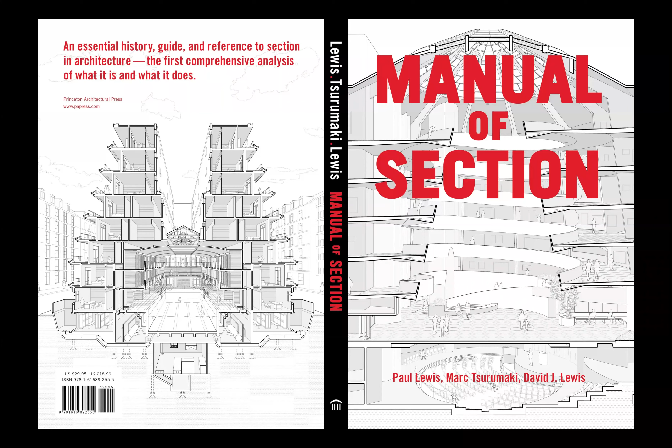So what I want to do with this talk, and it's a talk that we've been revising and working with for a while since the book came out, is actually talk about the Manual of Section and use it as a way to frame the work of our office. And just as an introduction to the Manual of Section, what we find very compelling about section is something that we've used instrumentally in the design of our work to begin with, which is that section is this fantastic, in our mind, purely architectural approach to design that is simultaneously incredibly abstract and also hyper-specific.

It allows you to look at things in terms of the way in which they're organized, but not necessarily the way in which they're perceived. In other words, it gets at issues that are more abstract, whether it's structural forces or interior-exterior envelope or circulation systems or relationships between social hierarchies, but to do it in a way that doesn't always privilege image. In fact, section is almost antithetical to image in the sense of facade and object, at least exterior presence of the object.

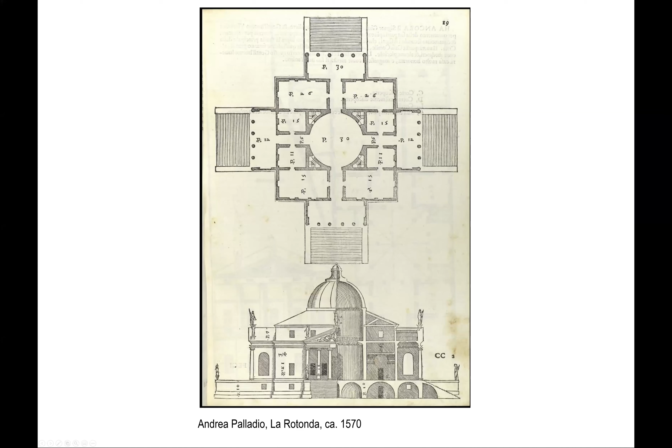And certainly you all know section as being one of the three canonical representations. It's often the support system for the facade, and everything's driven by plan. And from the standpoint of architectural teaching, we had been frustrated about the limits on ways to think about section. Again, it's instrumental in how we think. It's exactly where the tectonic specificity of architecture hits into spatial questions and organization. And it's also something that from a representational standpoint has a fascinating history, which I think is also why it has been somewhat less dominant within the last two centuries of discourse on architecture.

Section came in after, as an analytical tool after bodies existed, whether it's human skulls or monuments of antiquity. So section's history is actually a tool to understand that which already existed. And frequently section is used that way in architectural design. It's a way to section through your Rhino model. It's a way to understand the design, to allow technical expertise and consultants to weigh in. And this we find both a historic precedent and also a contemporary model, but it's ultimately a frustration. So we're much more interested in the ways in which a section could be generative for design.

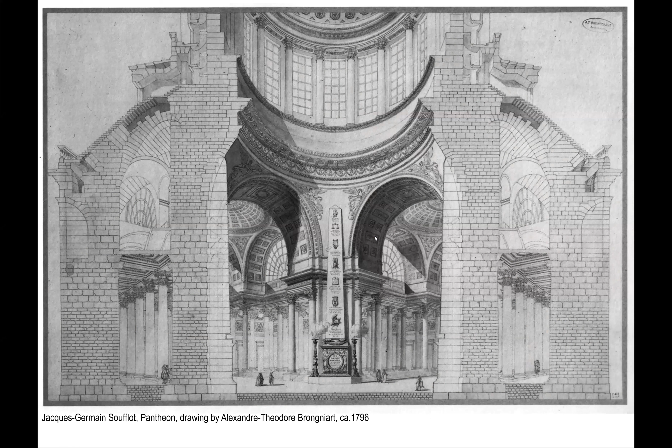We've also been super interested in section combined with perspective. You get this collapse between the abstract and the invisible with the highly optical and the experiential. So the section perspective is this paradoxical representational technique that we found super interesting. We've used it in our design approach, and it was the basis of the book. So what we did with the book was to try to say, are there ways to distinguish types of section? In other words, are there clearly different ways in which architects produce effects that could be played out through section and means of section?

So there are seven models we put forward, or typologies, if you will, which we felt to be distinctly different means, although of course most architects hybridize these in interesting ways, and we would never argue that any of these section types have value in and of themselves. It's simply a heuristic model to get at a logic of understanding section.

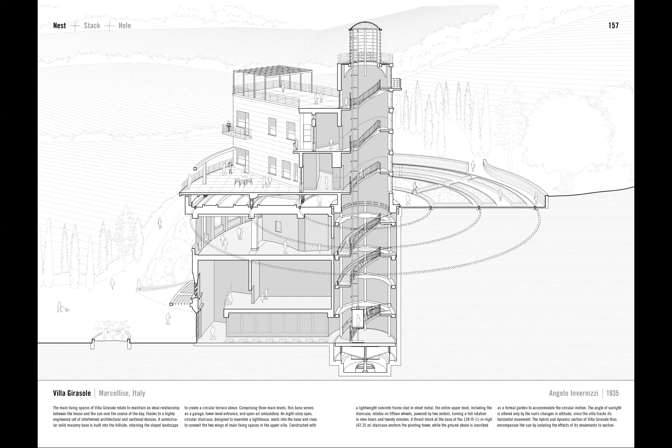We developed the book around 63 buildings of a range of scales, from small scale houses to very large scale buildings. And the key in each of them was to develop them as a single cross-sectional perspective that would allow us to look at the simultaneity of all the things that make architecture pleasurable. So whether it's details or space or organization, program, even, as much as we could, questions of context and position. But to do each page as a single drawing, an analytical proposition done not through hundreds of little diagrams, but through one drawing that would get at that complexity. So let me use the different types as a way to introduce our work, if you will.

So extrusion is the dumbest section type. If you get a bad review, it's probably because you basically extruded your plan up the height necessary to make the project have a viable space, and you're done. You basically haven't developed the vertical dimension very much. But there are ways that that can be done in an interesting way.

So for example, Philip Johnson's Glass House is basically pure extrusion, but it does so by intensifying the role of the glass. So the reflection, the elevations, because of the precision of that extrusion, now allow for this more complex exchange between interior and exterior, between reflection, between privacy, display, etc.

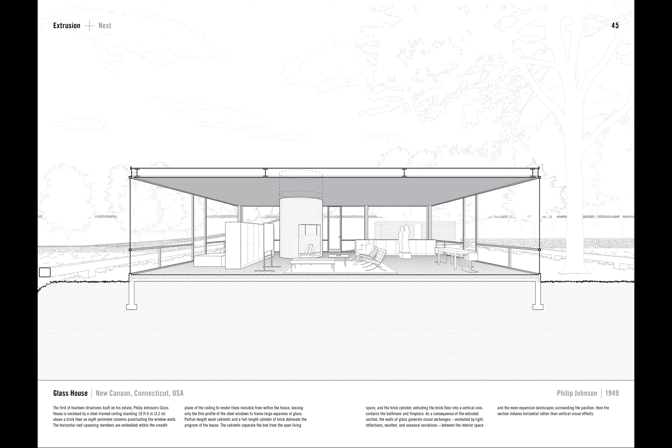So another example of extrusion that gets quite interesting is when you do it beyond conventional heights. So Nervi's amazing palace in Turin, where these things are 82 feet high and they become a kind of spectacle space. So it goes beyond normal conventions. So those would be two examples where extrusion started to push into more interesting realms.

So the first project I'll present, that Stephen mentioned in his introduction, we just completed last year, and it's essentially all an extruded project. It's purely plan-based. So in a lecture on section, I'm going to start off with a project that's basically plan-based. This is an early childhood education center, basically a preschool for very young ages, from 6 weeks to about 5 years, about 200 plus students, 20 classrooms.

And it was also a model school for teaching how to teach young children throughout the state of Arkansas. The site is flat. The program with young children didn't allow for any variations in section, not even a ramp or steps. Everything had to be flat.

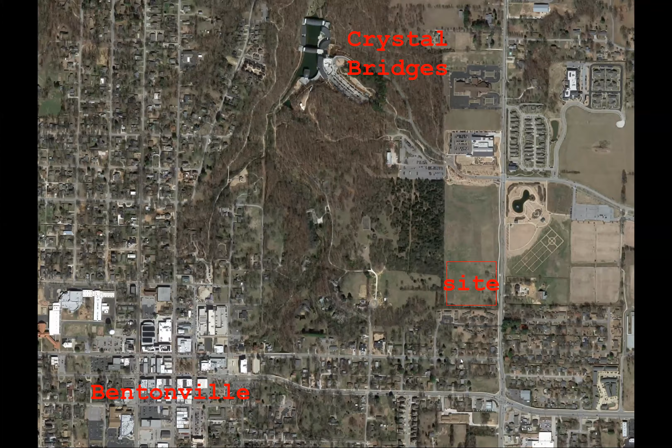And the budget was very tight, so we knew we were dealing with a very simple construction type, and that most of the exchange would be taking place in plan between the classrooms, between interstitial porches, and then the playgrounds located in coincidence with the different classroom types. So the younger kids would be here, gathered around the outside.

Are you seeing my cursor, by the way? So I can annotate, but then you have to toggle between annotation and the PowerPoint, so that's a pain.

But so this is slightly older groups, a larger scale playground out here, and then the 4 and 5 year olds would be gathered around the larger outdoor play area. So the project is in effect about relating interiors and exteriors, playgrounds and classrooms, as well as an entry court for bringing people into the project.

The diagram is based on extruding those double-loaded corridors, and then internal to each of those classrooms, developing a room within a room, so that one would effectively have a quieter gathering point within a relatively straightforward construction, bar joists and metal deck. But you would get this exchange between the houses visible in the hallways, moving to the inside, and even playing out in the cedar fence that runs around the building.

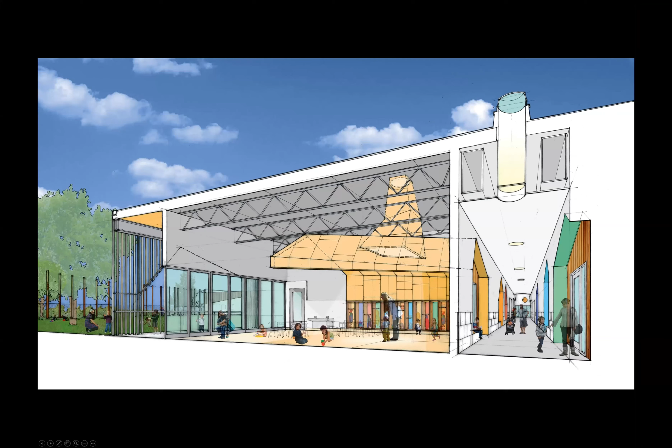So each room is identified by the image of the domestic house, coded by a particular wood material. That then extends out into a felt-covered, more private or acoustically slightly separated area that connects to this very large 8-foot wide outdoor screened-in porch. So even in bad weather, they can go outside, and then extend out into the play areas.

And here you see the traces of those projected volumes on the inside now being manifested on the outside on the cedar trellis that runs around the building. The other thing that was interesting was to find a way that that extruded height would start to be mapped out around the landscape.

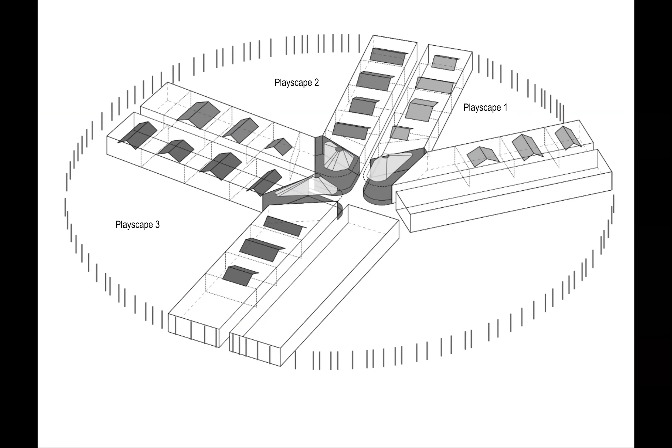We obviously had to have a fence relative to code around the playground, but we marched a series of 20-foot high posts around at the height of the extrusion of the building, so that it would turn the entire exterior and interior into an articulated space. And more importantly, at the front entry, they would be marked as battens on the facade of the HardiePlank, inexpensive construction.

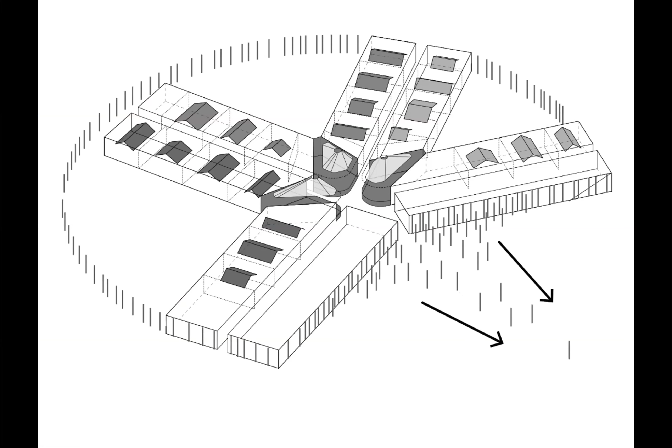But those would then filter out into the front of the building to animate or inhabit that entry cadence. So it was more porous at the entry and then became more protected around the play areas. And then inside, we were interested in ways that you could use the collective gathering point.

And this, we kind of referred to this as a centralized plan that has no center. In fact, every single one of these corridors misses each other. There's a much more complex geometry. It's not a circle, it's a series of arcs, and each of those has a different centroid. So we like the idea we'd have the efficiency and the clarity of a center, but without the kind of power control of a panopticon.

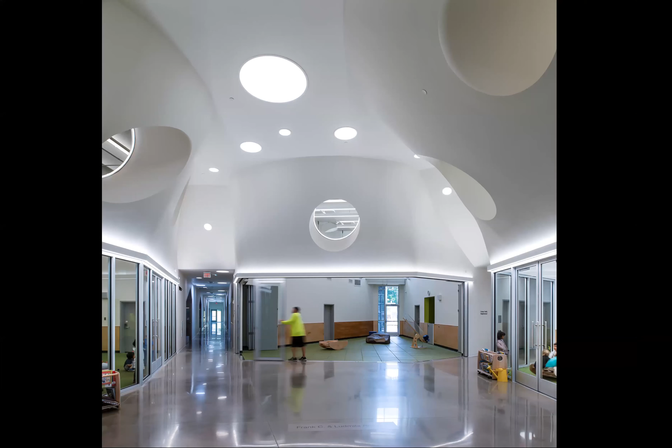And then internal to that center, we would take the hallways and, in a sense, bring that drywall into the space and billow it out to acquire these much more thick, almost kind of playful, cloud-like, Stay Puft Marshmallow-like qualities to this interior area, and then look at ways that we could use sliding doors to allow that central meeting area to also be a gathering room for the larger community. And here, an image looking up at the various oculi that define what we think is a more interesting heart of the project.

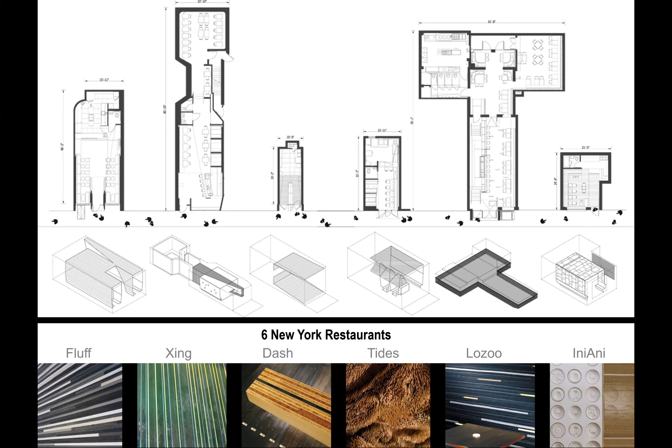So we've done a number of projects over the years that are limited to extruded spaces, and we often play up the intensity of the materials, and there's usually a shift between efficient plans and seductive surfaces, looking at ways that we can invent surfaces within that limited height. So again, if you can't do much in section, can we play it out through an aggregation of materials that produces variations in elevations as you go up?

So here you have the darker felt at the base where it gets hit by people, and then lighter as it goes up to the ceiling. So we would get some vertical dimension, even though we couldn't articulate that very well through any kind of a more complex spatial assembly. And here a view where that surface becomes a kind of signage, drawing you into this bakery.

Okay, so stack is also not terribly complicated. In fact, none of these section types are terribly complicated. They're pretty straightforward. But section is basically stacking extruded spaces on top of each other. Now, that's pretty banal. It doesn't tend to produce projects that one thinks of as having interesting sections, but there are ways to do it where it actually is much more interesting. So one is to start to look at difference. So you can have a kind of an A-B relationship, served and servant.

So the Kahnian model being played out through Mies van der Rohe in Crown Hall, where the lower floor, lower ceiling height actually makes possible the grand space of the studio above it, and again, two different extruded ceiling heights being fitted together, stacked together to produce beneficial qualities for both.

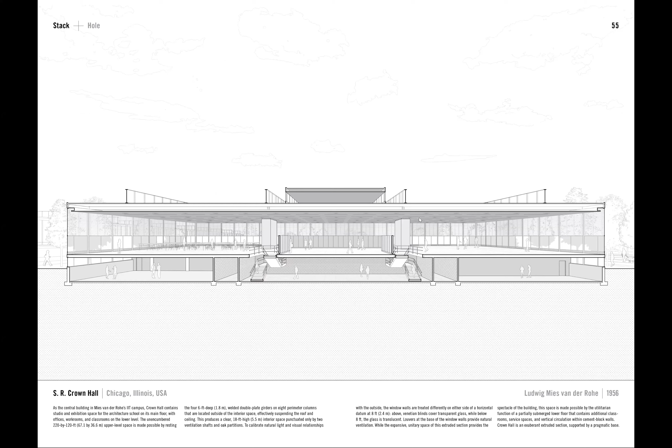And then this idea of difference in section played out through stacking was moved to a more extreme version, or a more explicit version, I suppose, in MVRDV's Hanover Pavilion. Each floor a unique section height, new material, new kind of environment, in a sense encapsulating the range of Dutch landscapes placed on top of each other to express their difference through their proximity in the stacked section.

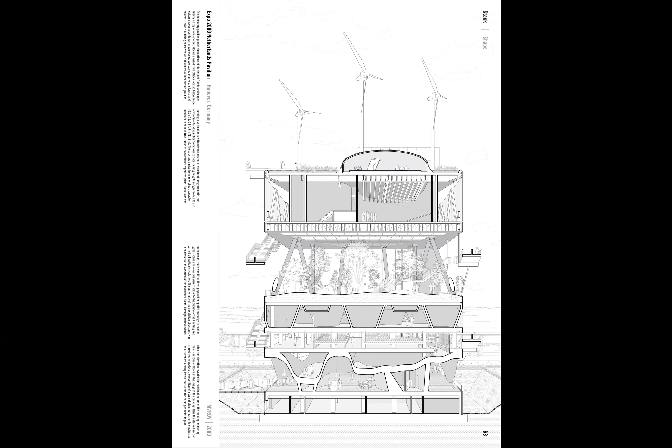So we've looked at using the difference in a stacked section to advance an architectural argument in a project called New Suburbanism, where we looked at how the horizontal real estate of a big box store could be used as a territory upon which one could then place the mini mansions. So continue the American dream that manifests itself in sprawl, but do it through section. So enable the continuation, but also the mitigation of the American dream through the role of section. So here you have the big box store below.

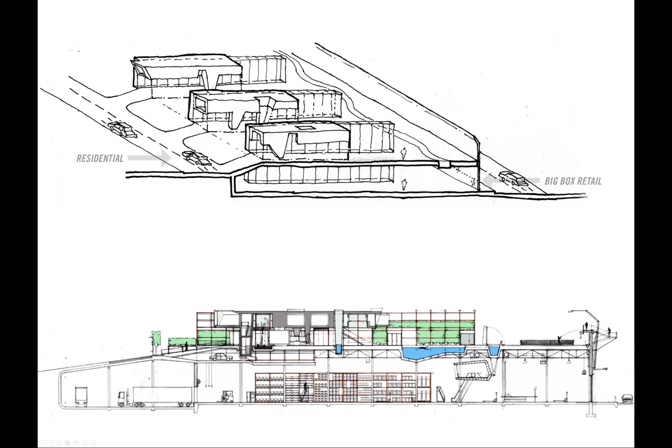but that they would be separated out relative to visual experience, meaning you would not necessarily see that you're above the big box store. You would have to actually commute around the block. And in the act of doing that, you could open up the parking garage to other community facilities, playing fields, and so forth.

All right, so the third model of section that we put forward was shape, and this makes the argument that architects have produced effects in section by not simply working with flat floor plates, but actually contouring them by starting to shape or modulate the ceiling, the floor, or both. That architects have been able to produce effects.

Often these are effects associated with structural efficiency or structural alignment in the roof, or they're used to puddle program, gather social groups because of the nature of the shape, being able to facilitate exchanges that now have certain hierarchies and certain levels of intensity within that geometry.

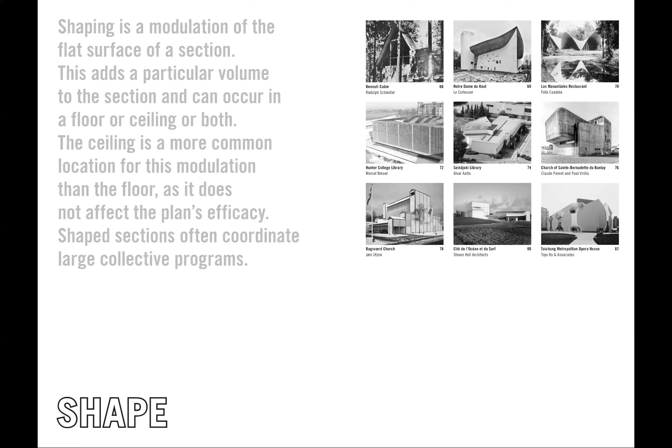So a couple of examples, certainly the structural one is most explicit in Felix Candela's thin concrete shells, amazing buildings. But what's interesting to note here is not only does this follow a kind of form finding strategy, but in so doing, the shape starts to take the scale of this restaurant and break it into smaller scale areas to eat that are then connected to windows to the park beyond. So there's an effect not just about structure, but also about program.

Similarly, Utzon's church outside of Copenhagen uses the geometry of the ceiling to, in a sense, choreograph the relationship between the preacher and the congregation, and to do it in a way that evokes the heaven, bring light in, etc. But that also plays itself out in this kind of amazing structural inversion, where in this case, the suspended ceiling is actually external to what appears to be the ceiling on the inside.

In other words, where typically in the United States, we suspend drywall ceilings from structural slabs, here this is reversed, where the structural slab is actually the ceiling, and then the cladding, the roof, the more rectilinear roof, is placed on the outside with a cavity space in between. So kind of interesting things that get revealed through section.

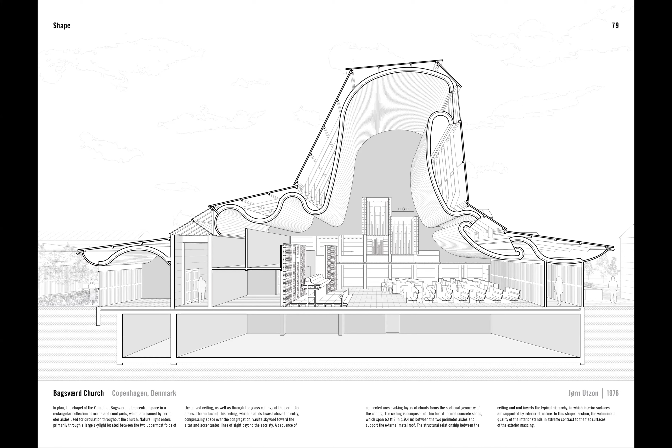Nowhere is that probably more legible than in Ronchamp. When you start taking a section, you start to realize the incredible peculiarity of this building, that what appears to be the thickest wall is actually made with some of the thinnest veneers of concrete, whereas the thinnest wall is actually the most substantive.

You have this incredible space in the kind of billowing underbelly of the ceiling, and how that has its consequence on program, where it's both a kind of cave-like space, but it's a cave-like space that's pushing, in a sense, out to the exterior, the pilgrimage church, and the hilltop location.

I like using this slide to talk a little bit about the difference between the continuous structural shape ambitions of a project and where it starts to hit its limits. So Toyo Ito's incredible opera house, which was a kind of repurposing of a previous diagram, now played out in this particular project. But you start to see that the shape section is actually not terribly conducive to larger scale buildings, precisely because there's not that much surface on which you can occupy.

And when it gets played out as a three-dimensional game, it really often becomes just enclosure. And then you have to insert a series of sections to enable it to actually work. So a kind of difference between a spatial ambition and the pragmatic realities of the limits of the shape section pushed to an extreme degree in the way in which Ito had done it in this opera house.

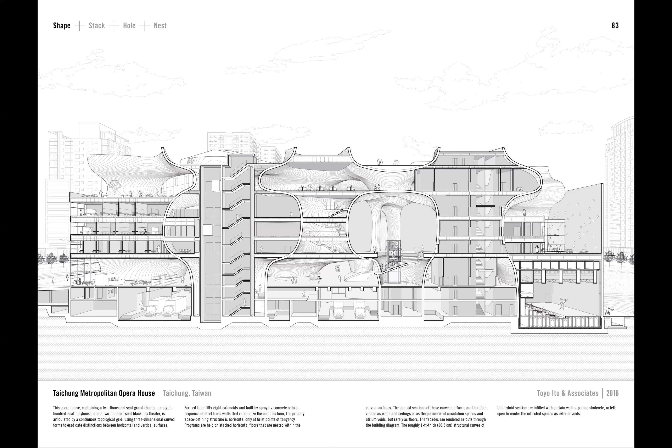So we had looked at how one could design an entire museum just by adjusting the floor and just by adjusting the ceiling. And this was a strategy largely for trying to win a competition where we knew there'd be 1,500, 2,000 entries. So we had to have a project come down to a super simple diagram, but be able to be expanded to encompass the very large square footage of the program.

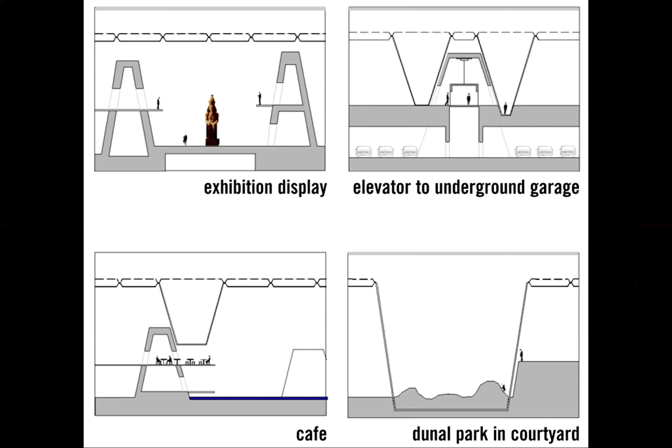So the museum is really just about the articulation of a ground and the articulation of a ceiling. And the strategy was to move beyond the conventional gallery to start to induce greater possibilities. So to, in a sense, get a multiplicity of spatial relationships that would be played out through a really simple diagram.

And that we would then also be able to visualize this through the kind of cross-section perspective to be able to show continuity between the ceiling and display cases, ways in which we could look at the exchange between interior and exterior within the project, while making sure that the entire project is constantly focusing as a series of parallel strands back to the Great Pyramids beyond.

We thought this was a great project. We were convinced we had a shot at this one. We did not win. I don't even think we placed.

But as Stephen knows, I like to make a joke about this, which is we then recycled this idea for an all-you-can-eat buffet in Las Vegas, which was the challenge of, again, a large program, and how did you break it into smaller scale units so it feels like a series of rooms within a larger pancake building. So 600-person buffet, all you can eat, big food service display around the periphery. How do you make this all possible?

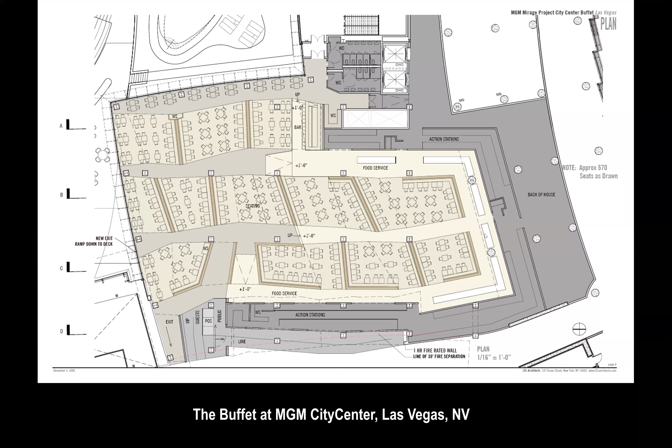So the strategy was to contour the ceiling, contour the ground, but to do them in alignment with each other. So you would get these different rooms in which you could gather, but when you stood up, you could actually get views to the food. So you both could nest into the space, but also have the visual continuity that you would want, looking both to the outside as well as to the food area.

And just to give you a sense of how that works, we become obsessed with reflected ceiling plans. We probably spend more time designing the reflected ceiling plan than we do the plan itself. You can do so much more in the ceiling than you can the floor, because nobody's walking on it. So designing the ceiling is essential.

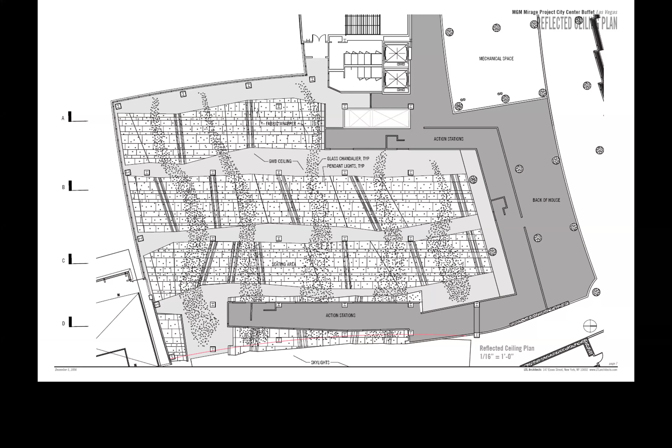It's not just a kind of technical result. Don't let Armstrong and other ceiling companies dominate how you design. Take it on as a key component of the project. And some senses of how those fields of lights would manifest themselves in different dimmable backlit surfaces, pendants, fields of pendants, etc.

So, a different project where we were working with the logic of a volume and how we would contour it was a renovation out in Claremont, the Claremont University Consortium Administrative Building, which used to be a maintenance building, and we were asked to convert it into an open office for about 100 employees. And the brief said no one should have a private office, it should all be open.

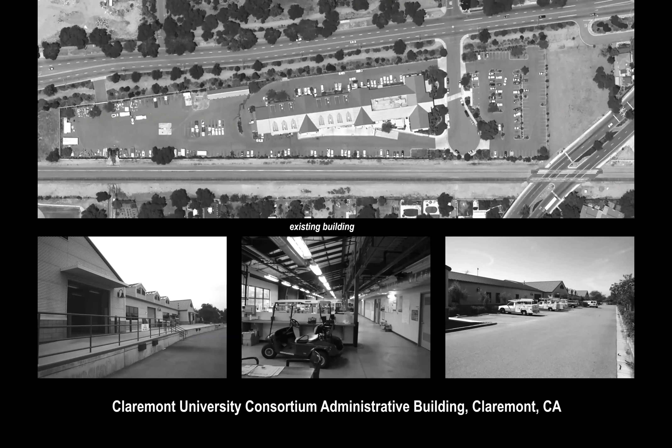How do you convert a maintenance building into an open office that takes advantage of some of the peculiarities that come with a maintenance building, namely these relatively column-free, large-scale trusses, 30-foot, 40-foot high ceilings? Could we use this to our advantage in making a much more unusual kind of open office space?

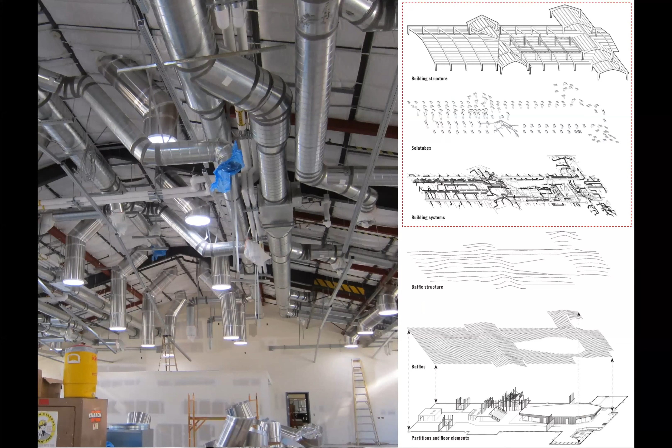A lot of our work, as I mentioned before, took place in the ceiling. So not only would all the ductwork and the Solatubes and all of the infrastructure have to be placed in the ceiling because the slab had already been poured, but how would we turn that into an advantage by suspending a series of custom baffles that would form a kind of sculptural territory or cloud that would gather people at the ubiquitous bleacher seat.

But in this case, we liked it because it didn't actually go anywhere. It just went over top of an electrical room that we had to keep in the plan. So it was an effective gathering point. But more importantly, we were able to use the ceiling and the Solatubes and the natural light and artificial light to allow the space to really animate during the course of the day into the night. So it really became part of the life of the project, as well as the gathering point and a sense of organizing the relationships internal to the program.

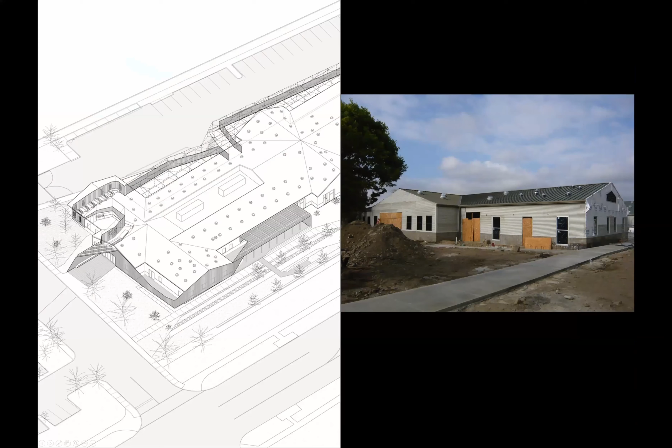On the outside of the building, we did a similar approach to take the fairly conventional building and use its geometries to do more. So extending those pitched roofs to gather outside areas, torquing the cedar screen up to produce a canopy for shade on the outside, basically making the building thicker at its skin to make the exchange between interior and exterior more inhabitable. And then even at the entry, that would be the defining characteristic, to turn that screen into an entryway that would bring you into the project itself.

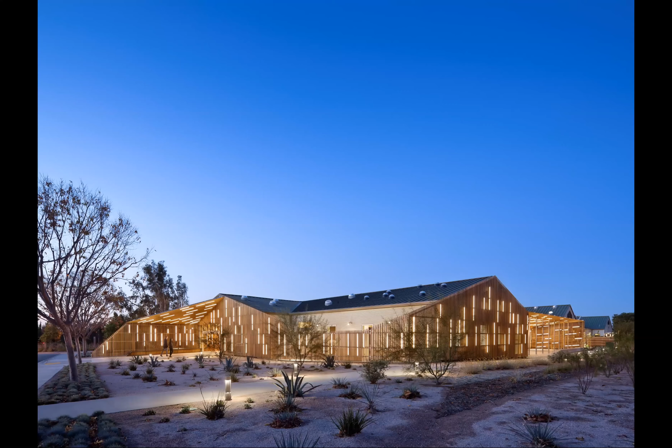And finally, a shaped ceiling that many of you are inhabiting, I appreciate the backgrounds, is a lecture hall at Columbia University in a McKim, Mead and White building.

We knew we couldn't alter any of the mechanical ducts in terms of their location because it would trigger a kind of grandfather clause and a reevaluation of some of the aspects of the building that we couldn't get into. So we had to try to embrace really the 20th century technology that had been added to basically a 19th century building, and do it in a way that both could benefit.

So the strategy was to work through a kind of coffer system that would be programmatically rich or functionally rich. It could be diffusers, downlighting, projectors, stage lighting, etc. And to do it in a way that it does taper up or is contoured to allow the windows to be visible, while also accommodating all of the stuff that's necessary for comfort and the use of the space as an auditorium.

Okay, so the next section type is really pretty specific to housing and to certain building types that need to maintain efficient uses of their FAR, of their floor, but they want to introduce greater capacities for inhabiting the section. And it plays itself out in two different ways, either vertically or horizontally. And what shear does is basically, it's where architects in the act of stacking their sections have started to look at incremental differences that could produce beneficial qualities in the vertical dimension.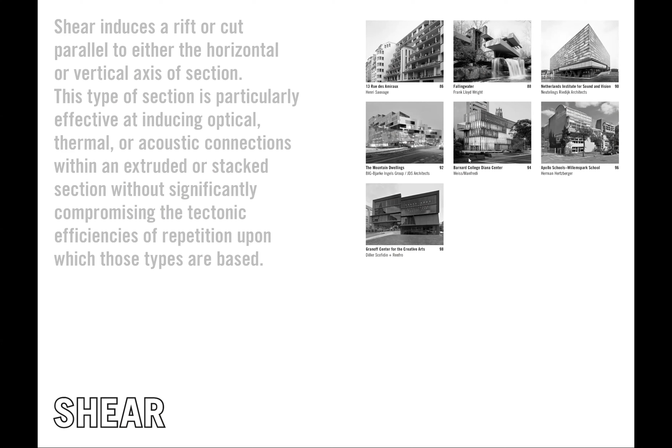So in the horizontal shear, where each floor is just slid back slightly from the next, it opens up one side of the building to light and air. And so Henri Sauvage used that to good effect in his project in Paris. And he was smart enough to realize that the downside to the horizontal shear is that the underbelly gets quite dark. And so by placing these two against each other, he was able to then fill that underbelly with a program that didn't need a huge amount of light, namely an indoor swimming pool. And so the project embraces both the beneficial side relative to light, as well as the darker underbelly relative to this particular program.

Now, one could look at the mountain housing and realize that in effect it was a parking garage first that was then clad in the housing. And as a result, it could achieve a much greater rake, that it could have actually a bigger underbelly. And then as a result, the terraces, the garden areas, the outside spaces for each of these dwelling units are actually quite expansive, quite open to the air. But it's because the ratio of parking to the interior was not 1-to-1, but in fact was a much larger parking garage than necessary for the housing itself.

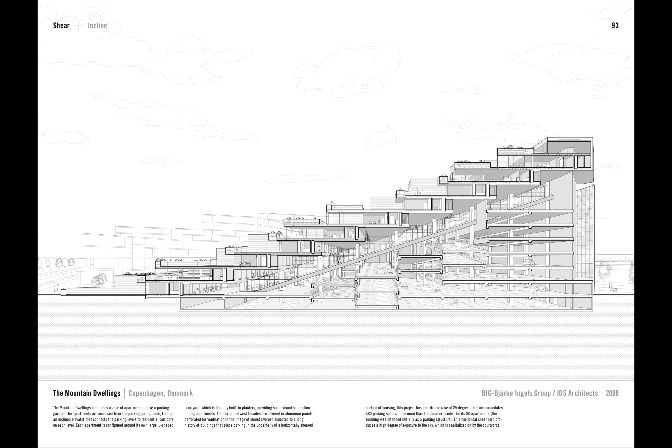The other model of shear is to look in the vertical dimension. And this actually introduces often more interior qualities, because it allows you to get continuity from floor to floor through the split level, allows you to get visual exchange, sometimes thermal movement, acoustic continuity, etc. It can produce a collective that Herman Hertzberger was incredibly good at using. Through that vertical dimension, he often would place stairs in this area, so you would actually inhabit the vertical shear, and then move the more private aspects of the classroom away from where that shear occurred.

Similarly, Diller Scofidio + Renfro used this strategy to great effect in the Brown Creative Arts Center, where that shear line was filled with two planes of glass for acoustics, but then allowed for great cross-pollination between different performing arts, from dance to performance to music to lectures, etc. Even the ability for one to pass through the building and get a glimpse as to what's going on within the building simply through the agency of the section.

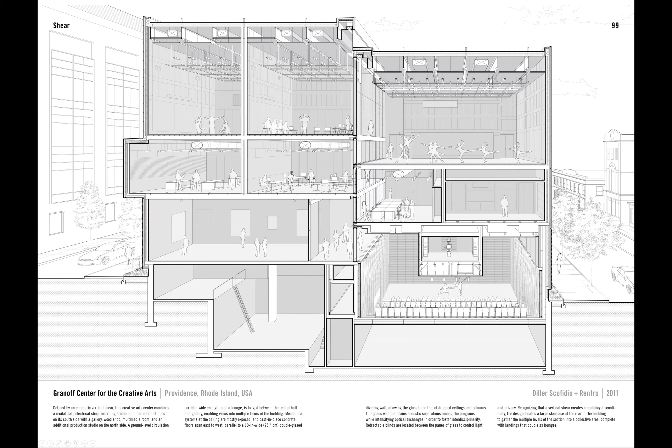We, in a much smaller project, worked with the vertical shear in a townhouse. This was combining two different apartments, and so we actually benefited from the misalignment of the floors of those apartments and filled this joint in with a staircase that became a kind of site in and of itself, but it also distinguished between more private gathering areas, reading rooms, etc., and the slightly larger living areas adjacent. So the vertical shear really defined the project. It became the location of the stair.

All right. So the next model, and I again will reiterate, these are not conceptually challenging types, is hole. And hole at some level is simply the removal of a chunk of floor plate that then has benefits in the act of its removal. And this often goes to the fact that, you know, when you don't build a portion of your floor, you have to, as an architect, often justify it. So holes can be everything from pragmatic reasons, elevators, mechanical shafts, etc. But they can also start to be used to organize entire buildings.

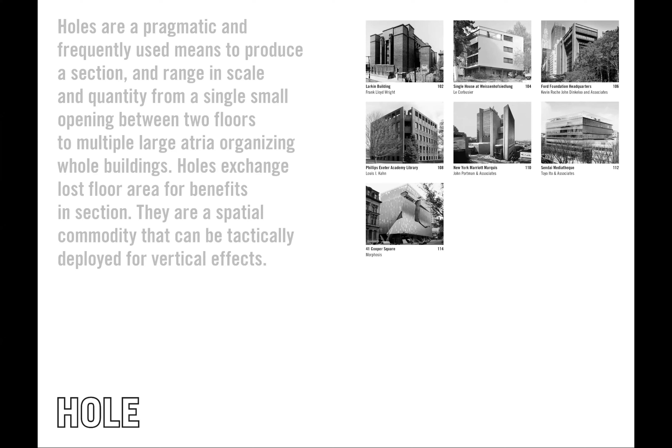So one could think about, or we like to argue, that Corbusier's Weissenhof-Siedlung, small kind of prototypical house, is basically a hole that allows for the double height space that sets up the hierarchy of the interior program, allows light to come deep into the floor plan, and so forth. So it involves removing a certain amount of square footage from the house, but the benefits outweigh that removal.

Similarly, that approach to a kind of a double height space or a hole now taking on the entire building could be seen in the Larkin building by Frank Lloyd Wright, where the entire project is really internally focused towards this large grand atrium that not only is the identity, it's the social heart, it's part of the mechanical cleansing system of the building. In a sense, this void becomes the substance of the project.

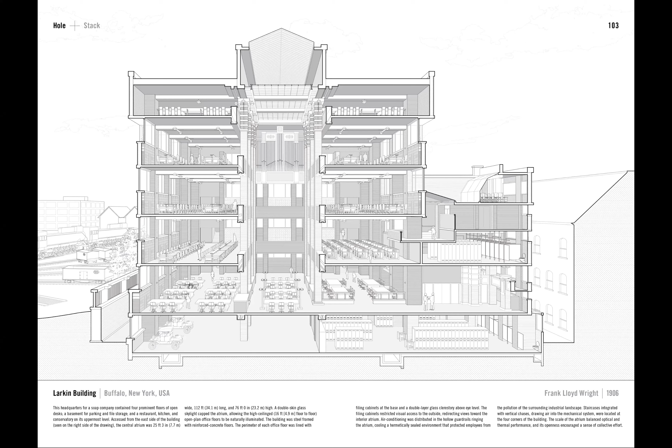You could look at the Ford Foundation, make a similar argument that the architectural quality of this is, in a sense, the absence, the hole. And again, it's nice to notice here that there's a bit of a horizontal shear taking place here that allows the plants to grow and to be able to use the underbelly over here as an entryway into the building. So section types don't operate in isolation. They're much more interesting in combination.

And then probably one of my favorite uses of the hole was the kind of counterintuitive approach by Toyo Ito, where the column, usually a solid substantive entity, is now morcellated and becomes the connective tissue that not only holds up the building, but also forms the circulation, forms the optical connection, becomes the connective tissue literally that separates and also connects throughout this entire building, which, by the way, has a series of stacked sections of which each section is unique. So, all right.

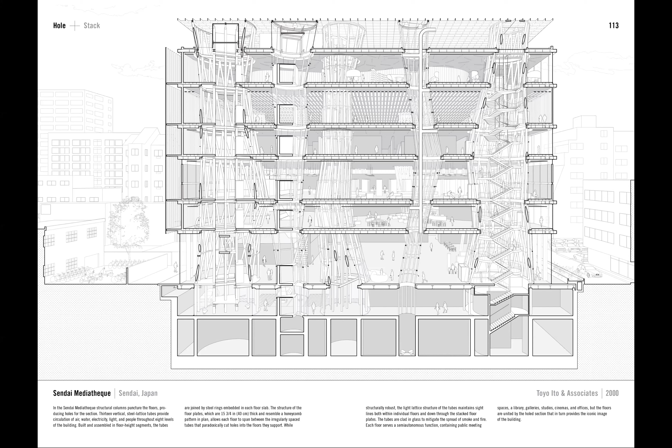So we often look for ways within programs like residence halls, which tend to resist section, not just from a budget standpoint, but also from a standpoint of the efficiency of these construction types, to try to find a way that we could use the stair, the communicating stair, quite literally as a communicating stair in an extreme degree for Gallaudet University, because it's a university for the deaf where sign language is essential to everyday life.

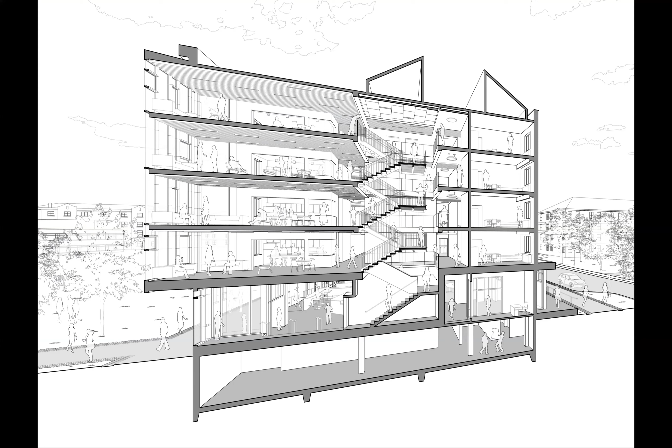So in a sense, pulling the stair away from the edges of the floor, floating it to allow for greater visual continuity, sight lines for sign language, was essential to allow conversations to occur on the stair as well as from the stair into the various lounges that are adjacent to it.

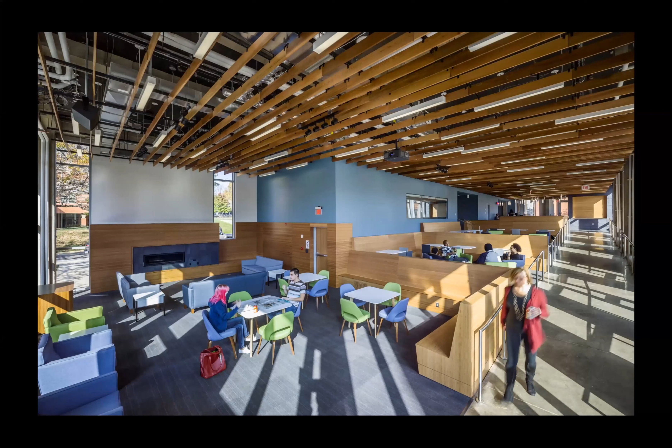In the lower level, this issue of optical communication became really interesting. We needed to find a way that we could make the lower floor lounge have areas where people could gather, but also be able to enable this to become a kind of an auditorium. So this really got more with the shaped section, the kind of sloping and the terracing of these levels to allow this to work in multiple ways for the specific demands of this university.

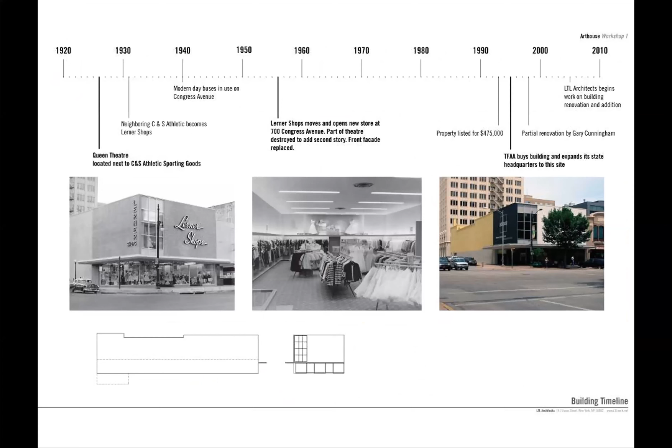With the project we've worked on kind of on and off for about 10 years in Texas, we were working with an existing building, and so a lot of the questions were how could we tactically modify this building that was at one point just a proscenium theater, but it had acquired a department store, so it had a floor that was placed inside what was otherwise an open space. So how could we strategically open up that department store while still taking advantage of that upper floor as a main gallery area, while also solving some of the circulation problems, the mechanical problems, et cetera.

So this was done by focusing a lot of attention on things that move between the different levels. The staircase in particular became the kind of heart of the project. And for us, we were trying to find a way the stair wasn't simply kind of placed in, but actually started to stretch out and connect to other aspects of the architecture, that it had this base that really came out of the concrete floor, and then was connected to a series of suspended stair treads that would drop down all the way from the roof deck, extending down about 35 to 40 feet.

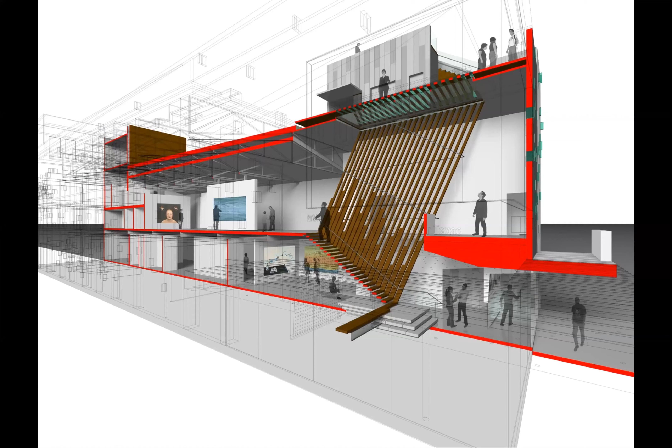Each individual tread would have to be put in place individually and bolted to the floor slabs, to the holes that we had cut in the floor slab. And so here, actually, the finished stair was going in before the building had even been closed in. Each one was craned in and carefully kind of slotted into the structure within the project.

And because of the slope, which was the slope of the stair in both axes, was a product of taking the nosing of the stair and extending that incline to the rest of the geometry. But that meant that you had a stair that would go from about 5 feet wide at the base to 8 feet at the top. So it basically opened up as you moved to the main gallery.

And it meant that you could stand in the main gallery and look down and see all the way through to the sidewalk beyond, which we felt was important to connect the project as much as possible through these different layers. Here, a view from below looking up at the space that's revealed moving up the stair.

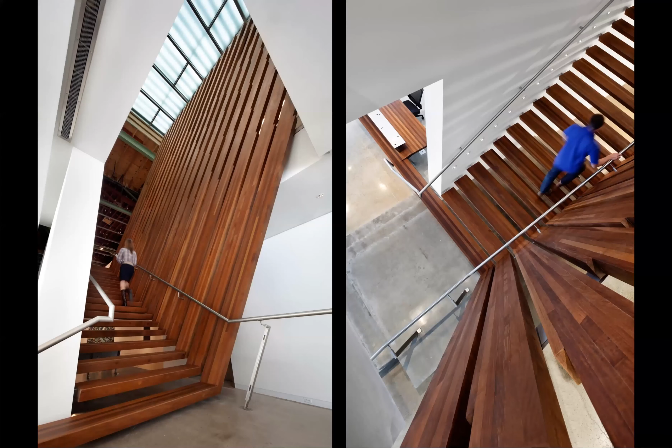More recently, we had the challenge of the program and the organization had shifted from art house to the contemporary. We did a round of upgrades to improve some of the mechanical systems to bring it up to museum standards. They were going to be bringing in and have been bringing in quite substantial and really quite amazing installations, but it brought in the issue of we had to get crates up there, and the original design was not set up to enable that scale of movement.

So rather than lose a whole bunch of real estate to a freight elevator, we worked with a scissor lift that would be used to, in a sense, kind of move stuff up and down. And my favorite moment is then the floor returns and basically the space goes back. So it was a way of kind of enabling the movement in the section, but without compromising the square footage that you often lose through holes.

Just some other examples of features in the building. We had looked at ways that you could have large-scale pivoting walls based on reinforcing the upper structure, which we had to do from a kind of structural standpoint. That had a series of tracks and enabled us to do these kind of operations.

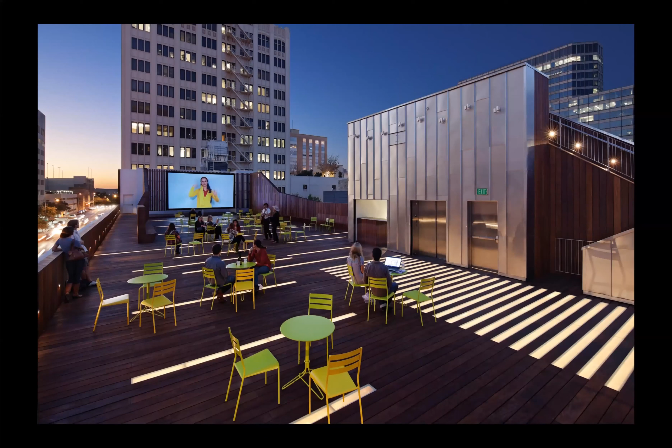And then the roof deck, which turned out, based on the original renovation, was one of the more popular spaces. We had the opportunity to come back and make it better relative to the Texas climate by placing a shade canopy on it. So that, in effect, was a kind of an extruded section, but we did it at a height of 23 feet with a knife edge, so it would be as weightless, or have the appearance of weightless, as possible. It's sufficiently high that it really does feel as though it's not just a conventional floor.

It becomes a backdrop for Jim Hodges' art, with a text of "With Liberty and Justice for All," which is a kind of fantastic marker in the heart of Austin, Texas. It's a kind of great backdrop for protests, and I hope it continues to be, although I'd like the nature of the protests to shift a little bit in Texas, but that's another story.

And then the roof deck, we were looking at ways that we could find a weather enclosure, and I had looked at a kind of screen that could be tracked with these high curtains that could enable the space to be transformed from an outdoor room to something that has a more gossamer interior consequence.

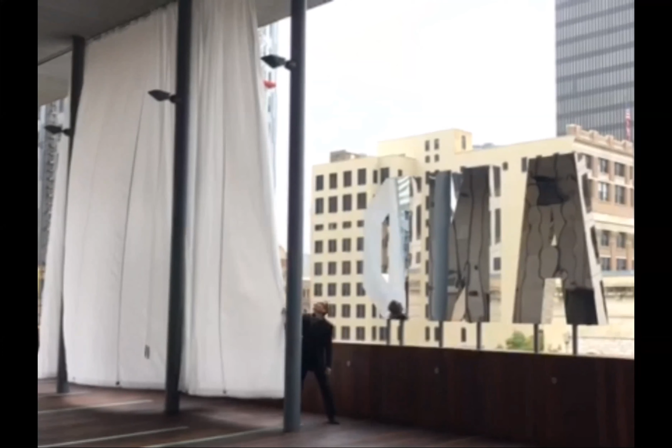And what I think is very effective about this space is it enables a sense that you are part of the museum, you are part of its kind of interior, but the ceiling height enables this connection to the city that doesn't make it feel like you're purely within the confines of the museum. Okay.

So incline is a peculiar section type that comes with some difficulties. On the one hand, it seems to be very straightforward. It seems to enable a way to link a plan to a plan without having to deal with the distinction or the separation between those floors. So basically, you can go from a floor to a floor by simply oozing the plan into the section.

The downside to incline is that whatever continuity you produce, it comes with, in some ways, a much greater discontinuity. So what I mean by that is that in Villa Savoye, you get about 4 feet of continuity up the ramp, but you produce 10 times as much discontinuity across the plan.

And that struggle of trying to deal with this disproportionate relationship between continuity and discontinuity is kind of at the heart of a lot of projects that are based on inclines. And they get developed in different ways.

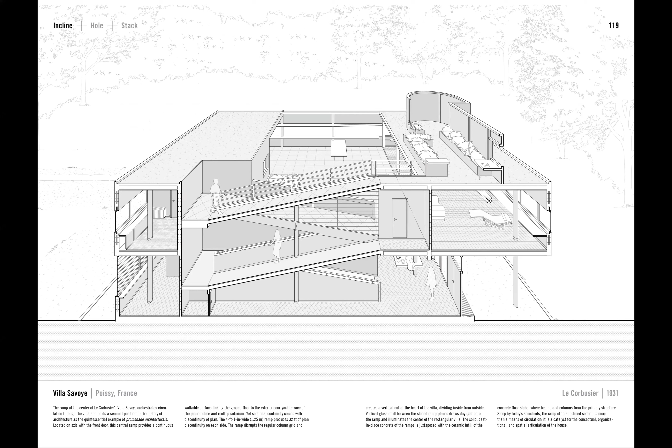So you could look at Frank Lloyd Wright's Guggenheim and say that to a certain degree, this is essentially a continuous ramp whose discontinuity is absolved by Wright inserting a very large hole or an atrium. So where you would have had discontinuity from side to side, it's now opened up through visual continuity, and the physical discontinuity is in some ways absolved because of the intense visual exchange that can take place through this area.

In a very different way, but with a very similar diagram of a continuously unfolding museum, OMA and Koolhaas developed a project where that discontinuity was actually intensified. So it's in a sense diametrically opposite logic from Wright and the Guggenheim, where here the extreme proximity along the incompatible or the shear lines of those ramps is in fact the heart of the project.

So the peculiarity of bringing an exterior walkway in that immediately forms an entry in the heart that leads right into a reception desk that is now part of the auditorium, moving down into the galleries only to emerge at the top of the auditorium to extend up to the roof, etc. So it's basically constantly sideswiping. The project is constantly intensifying the sideswiping effect of programmatic difference. Again, that is part of the built-in difficulty, if you will, of the incline.

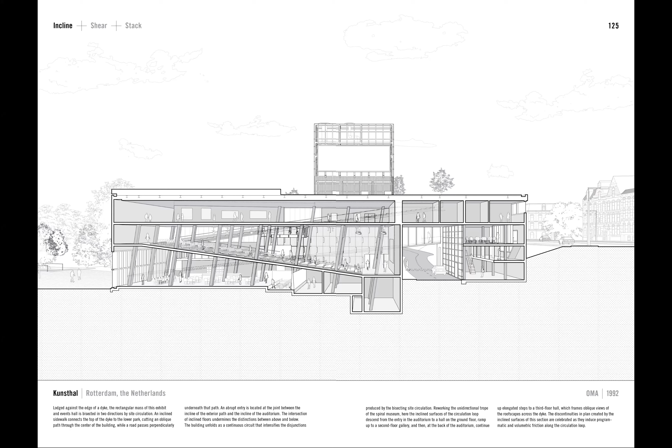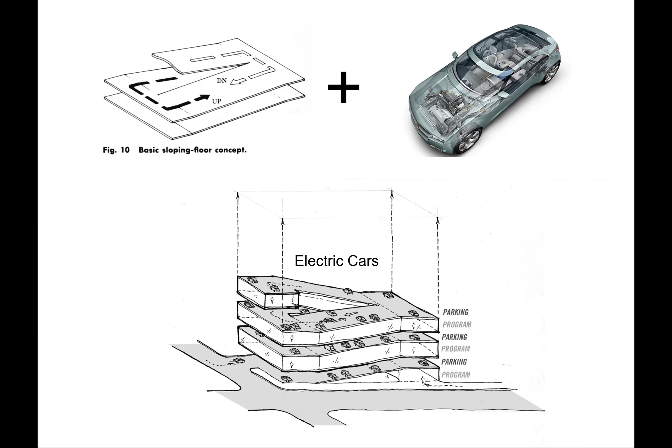So we, in a project called Park Tower, like many architects, tried to develop a continuously unfolding ramp. And we tried to figure out a way that we could take the emerging technology at the time of electric cars and hydrogen vehicles. And if you didn't have the toxic emissions from a car, could you actually have a drive-out skyscraper? Could you get car parking and program to be much closer together to basically have a double helix of a skyscraper that would go from retail at the lower level where you needed more parking through to a kind of hotel level, less parking required, to an office level, and then finally up to a residential level where you had the least demand of parking.

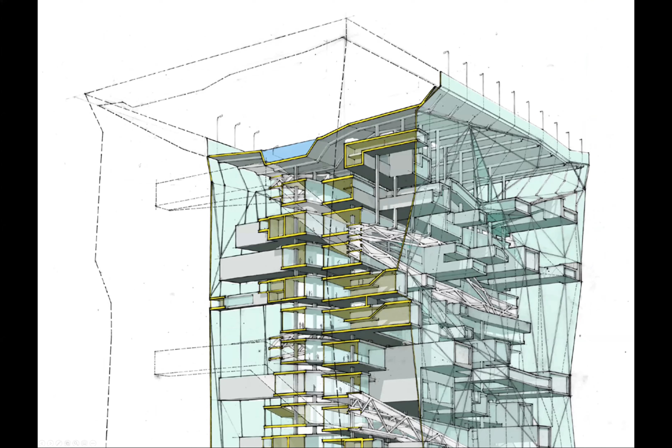And intertwined throughout this section would be a series of express ramps. So you could either go the continuous ramp up the parking lot, or you could use the express ramp and work your way to the top of the building. But in the act of doing that, we were trying to find ways that we could take conventional programs like strip malls and wrap them around each other, take parking lots and wrap or stack them underneath the strip malls, and then in the act of linking them together, similar to Wright, but also drawing on Koolhaas, get that kind of proximity into a kind of seductive mix.

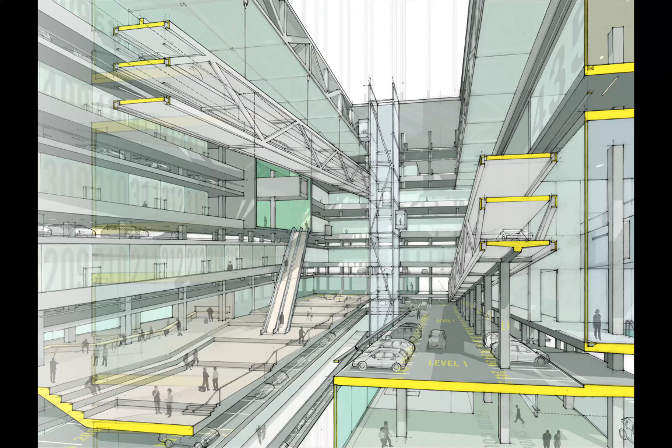So you could both get exchange, optical connection, every parking lot is a good spot, and every space is a good spot, and you can get access to your big box store through a more interesting social center, or social atrium. The hotel floor merged the kind of lowbrow motel with the John Portman atrium, the spectacle with the mundane. So again you park right above your hotel room or your motel room, descend down. These effectively wrap around the more spectacle-like atrium, complete with the express ramps flying through there, and even ways that we could get the swimming pool and the parking garage as a kind of diving board to link all of these things together.

And then on the residential level, looking at ways that you could kind of park on top of your vertical unit, and that now your neighborhood might have patches of grass, but then they're stacked vertically as opposed to sprawled horizontally.

All right. So the last model of section is nest, and this is actually quite a bit different. And I think at one point we had nest divided into a couple of different types, and then at a certain point we said, look, let's just for the sake of clarity argue that it's its own type. And what distinguishes nest from the other section types is that it's where the design has been foregrounding the volume of a component rather than the floor slab of an approach.

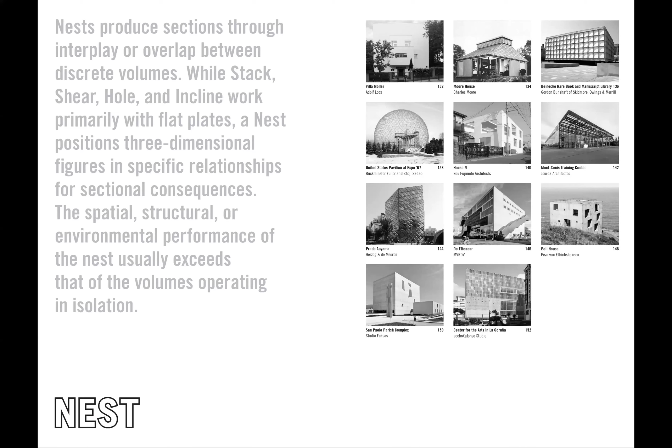So, obviously, once you start doing that, you can nest in multiple ways. You can look at different ways to either overlap, intersect, scale, etc. And certainly that's been used to good effect. So a very diagrammatically clear example of this is Fujimoto's House N, where not only do you get a room within a house, but you also get a perimeter that is closer to the property boundary that doesn't distinguish between an environmentally interior and environmentally exterior.

Air can move through this, but it starts to stage the house as this more complex exchange between these nested Russian doll like figures. A slightly different version is Charles Moore's use of the nested kind of skylights or these theatrical spaces where the living room and the bathtub in the heart of this relatively small cabin are bringing light in, become kind of ceremonial spaces within a really quite simple domestic assembly.

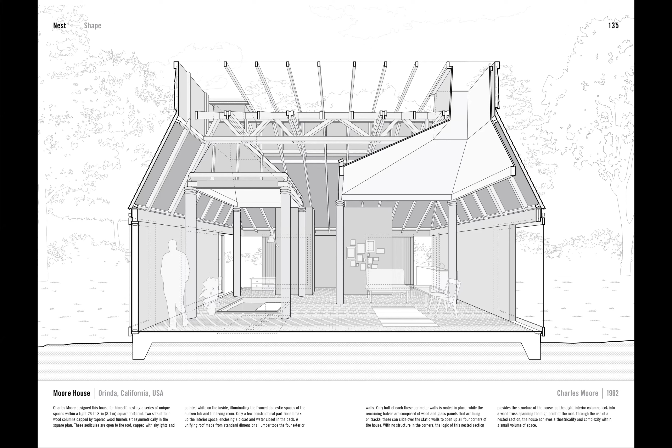Or Beinecke Rare Book Room, where now you're starting to look at some of the environmental benefits of nesting. Here, the Rare Book Room is environmentally or humidity controlled in ways that are different than the space around it. And even that privileged kind of skin, translucent stone skin, is made possible because of all the buried program below the plaza. So again, a kind of nested section that's dependent upon a more complex building development.

And then a very explicit example of a thermal kind of environmental diagram that the nesting strategy allows is Jourda's Mont-Cenis Training Center, where you have a photovoltaic, completely passive skin box or shed, giant shed that's placed around two fairly straightforward buildings, and in so doing produces an interstitial layer that can modulate between the extreme temperatures of the outside and the interior by producing this interstitial layer.

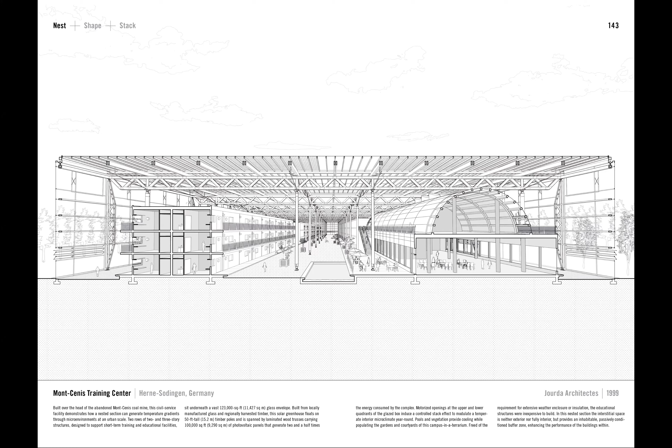So we've been really interested in the nesting model in some recent competitions, in particular a project that we won in Telluride that had actually an existing stone wall. It's one of the oldest fragments, kind of extant fragments within Telluride. And the question was, how do you design this as a performing arts center where you might have different performance criteria of the envelope? And certainly one wouldn't want to come in and kind of just simply seal off this porous brick, because that's actually its unique character.

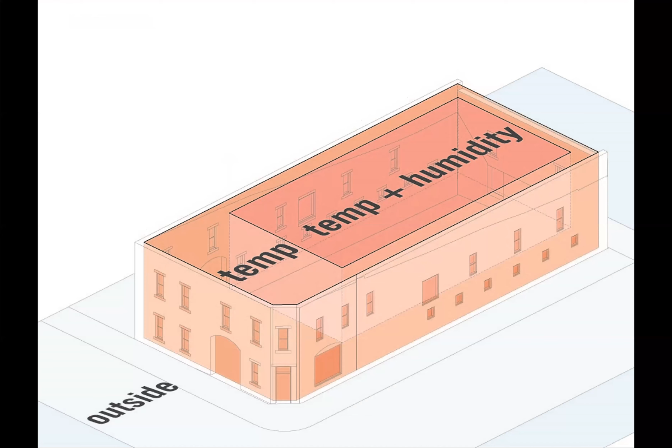So we knew very early on that we were going to be looking at placing a building within the building, and to do so both from an architectural quality, but also from an environmental one. So we would see this as a kind of interstitial exchange that would both engage program, but also temperature and humidity. We could have the stone walls, place inside of it a timber figure, kind of CLT figure, complete with a fireplace at the top, and then use glass and operable devices to start to be able to fine-tune the environmental characteristics between the stone and the timber.

And then the project really is about the exchange between these two different materials and two different thermal programmatic conditions. So here, say in weather conditions that are colder, it could be sealed off, but then it might open up if the weather gets better and be able to be used in nighttime as well.

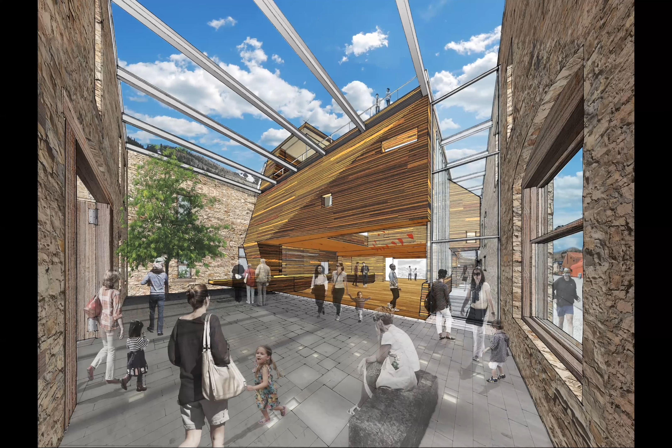We wanted to find a way that the building and its sculpting really does kind of stage the relationship between, say, the stone wall, so how the building itself gets opened up as apertures for the stone, looking at the staircases and actually elevator inhabiting this interstitial space, so that you can move up in this kind of gap between the stone and the wood, up to the main gallery level, which is on the second floor.

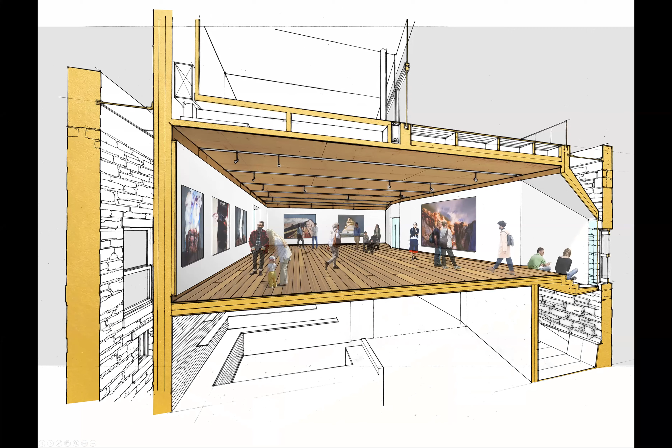And again, even that, the idiosyncrasies of that are about misaligning different windows from inside the gallery to the existing windows on the building exterior skin. And then the rooftop, which gets above that stone, but now is able to look at the amazing box canyon of Telluride that exists beyond.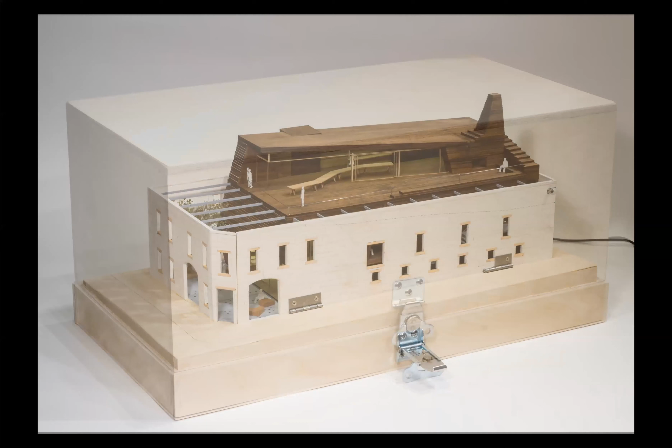Because it was a competition, we had to sell this idea at every single level. So even the model case that we used was based on the same strategy, where we would have the ability to unveil the project, but also recapture it, or basically push it back into a nested box. So we're very pleased about winning this competition, and we're still optimistic that the project will move forward, and we'll keep our fingers crossed.

So I think the last project that I want to show is a museum we opened recently in New York City. It's a museum for the poster. It's certainly the first museum dedicated to the art of the poster in New York, and a kind of unique opportunity to think about how one displays that type of medium in a museum dedicated to it. So the space was defined by a series of these cast iron columns going all the way down. It stretched mid-block from 23rd Street to 24th Street, about 220 feet long. It slopes about 2.5 feet from the north to the south continuously, so it's not a flat floor.

And we knew we were going to have to figure out a way to engage this original existing space dealing with similar questions of humidity. So this is the kind of diagram of the volume of space we were given. The question was trying to figure out how we could kind of nest a humidity controlled gallery while still allowing a public promenade, so that in a sense the posters could be exhibited in a kind of street-like space that is the origin of the poster, or one of the original sites of the use of the poster to begin with.

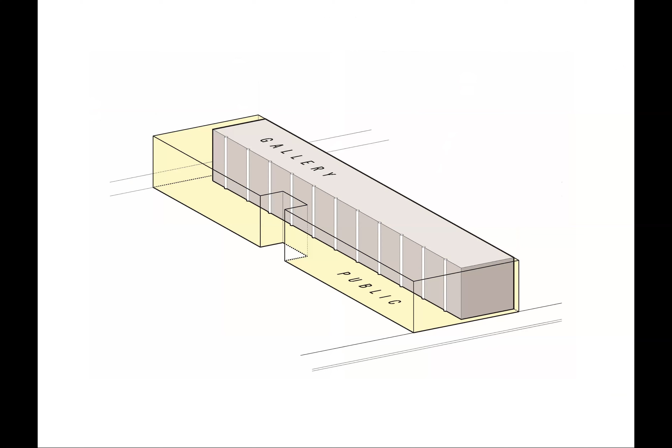We went through a series of different approaches to do that, whether it was a wall or a figure or a volume. And we ended up with a kind of operation where we would open up more of the gallery to the north side, to the 24th Street side, and open up the public entry area, the bookstore, and some of the entry sequences more towards the major entry on 23rd Street.

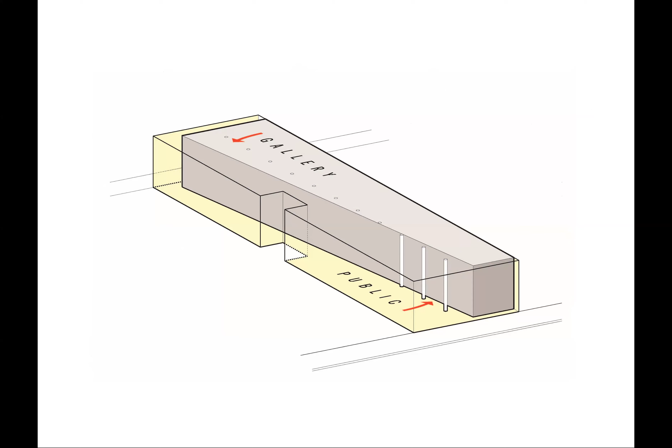And then by starting to kind of torque some of the lines that would produce this, we were trying to find a way to make you feel like you're moving into a space where, at every step down the length of this promenade, the section would be changing. And the intersection of these two lines that are defining the major geometry of this form would occur at the entry gallery.

Whereas the other side would be developed as this kind of built-in piece of furniture for the bookstore, a kind of waiting area, the coat room, the cafe, the ticket desk, the descent down the stair to some education facilities and additional galleries below, as well as a kind of cafe waiting area towards 24th Street.

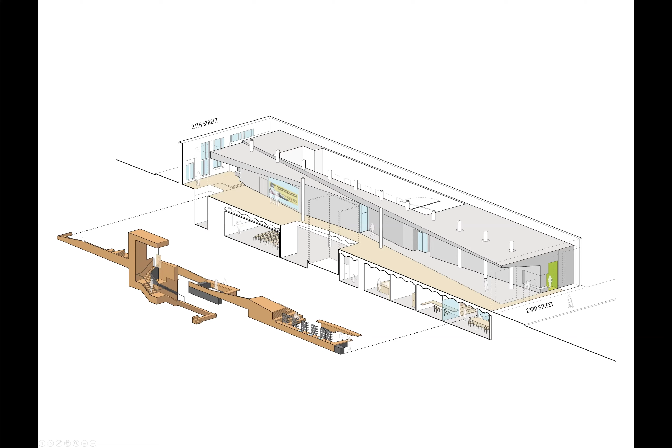Here you see the kind of long section, that slight shift as you go down the model, looking at how this was developed. And this is a sequence of sections moving through the project, showing how every 5 feet the section shifts, so you move into the humidity controlled gallery and then back out to 24th Street.

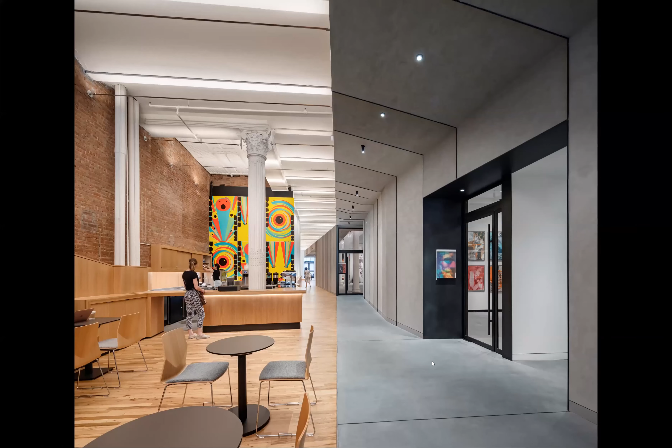So here's some views of it, and we really like the fact that you get this kind of split screen, this clay kind of volume, and these steel lines are actually drilled so that it's basically a hanging system for the posters. Plus being able to have a kind of display desk be part of that system, and get that registration of the split between the galleries over here versus the more continuous promenade, the wood.

This is the existing wood floor, existing brick, existing vaults, etc. So the new nested volume being placed and it's attenuated down the length of the space. A view back, again, this very large. I will say building a 220-foot piece of millwork with a floor that is constantly sloping is a bit of a nightmare. But it means that basically your kick is constantly changing and adjusting, and became kind of an interesting question.

Here, a view in, we were really interested in ways in which the columns and their capitals could appear and disappear, working with lighting designer Lumen Architecture, who I think did a fantastic job finding ways that we would both bury the columns, but then reveal them and illuminate them through that thickness, getting away from the idea that either you have to bury the column or display it. We would do both.

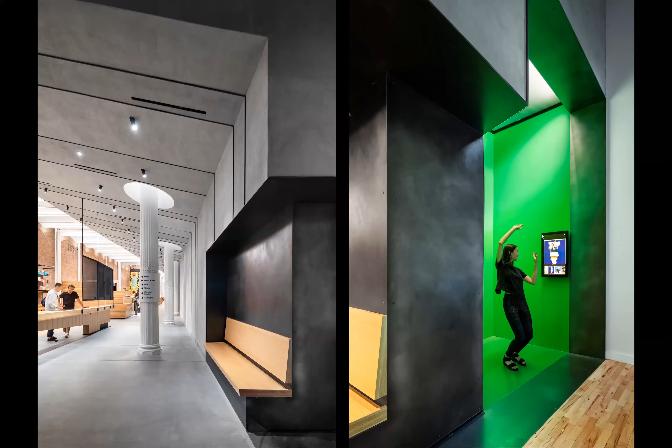And then there's some details. Veyko did a lot of the fabrication of the metal, and then some of the work going down into the lower level. And at the front of the building, we placed in the picture window a green screen room, so you could actually embed yourself in posters.

So this is my son, the Attack of the 50-Foot Woman here, and wanting you for the U.S. Army. So there's something nice about the fact that the architecture enables you to now inhabit posters, and even the urban section being played out at this different scale.

So anyways, hybrids. Hybrids, as I mentioned up top, are really where most architects who do interesting work in section spend their time. But for us, we like the idea that one can now look at SANAA's amazing Rolex Learning Center and say, well, actually, it's an extruded stack section that's been shaped for certain reasons and then perforated with a series of holes, so each of those section types are being played out here, and they have different consequences, but they're being arranged in very different ways.

Similarly, Kengo Kuma's tourism center is basically a series of stacked shaped sections, which, you're probably saying, well, that's kind of paradoxical. Well, it is, because there's an incompatibility there. And so that's where you get these kind of interstitial spaces that recede back from the facade of the building in order to enable the stacking to be legible.

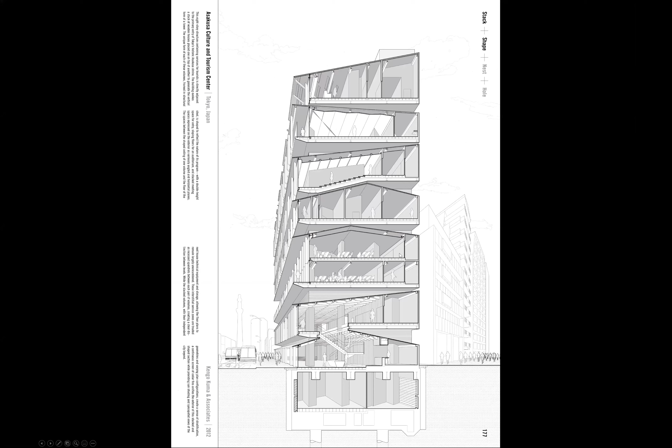Or another kind of stacking of shaped sections, but now arrayed around an atrium by Herzog and de Meuron. And then the architectural petting zoo in section of the Seattle Central Library, inclines, holes, shapes, etc. Kind of an amazing tour de force of section by OMA.

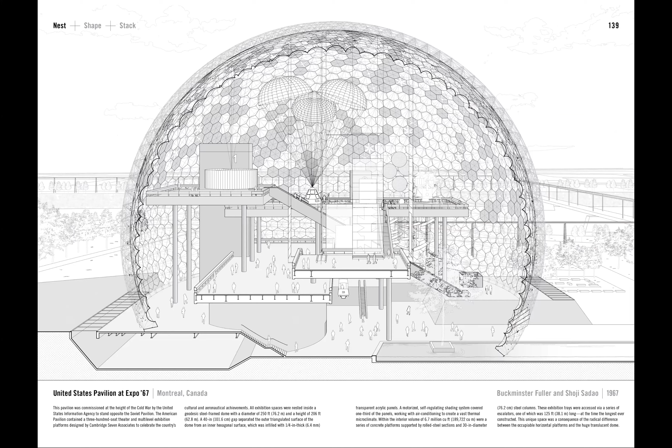Should I stop? So I can very quickly just show, often this is useful. The way this was done was to develop these things in incredible detail in Rhino. We used existing buildings. We needed to get access to working drawings and work through photographs, but we also went to archives, met with, say, Buckminster Fuller's associate partner, Shoji Sadao, to get access to the working drawings, to be as precise as we could with these things.

They would be modeled interior and exterior. We spent a long time trying to figure out, all right, if you had to have a single view, a single cross-sectional perspective, where would it take place? Interestingly enough, in the Bucky Dome, we didn't want to take it through the center. We actually moved it just in front so you could see a better sense of the three-dimensional volume. The interior was modeled as best we could based on archival photographs.

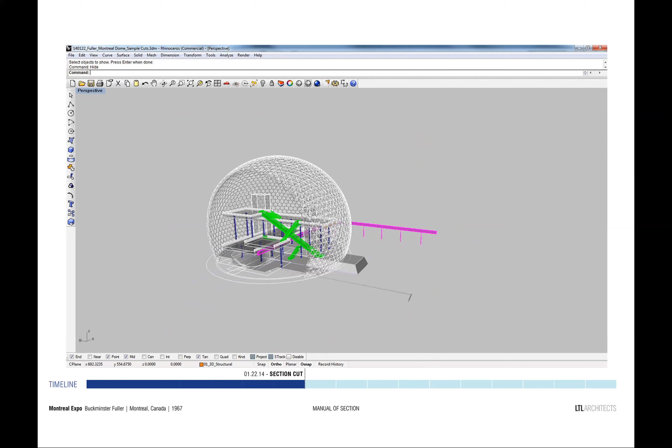And then even the context was modeled as much as we could, recognizing the impossibility of doing this accurately, because you're drawing a section, you're drawing through something that you can't actually see. So there's an inherent flaw. We would have the pleasure of redlining these things to try to get consistency in order to get to a drawing that would be as consistent and accurate and be a kind of scholarship. We like to regard it as a kind of visual scholarship in the discipline.

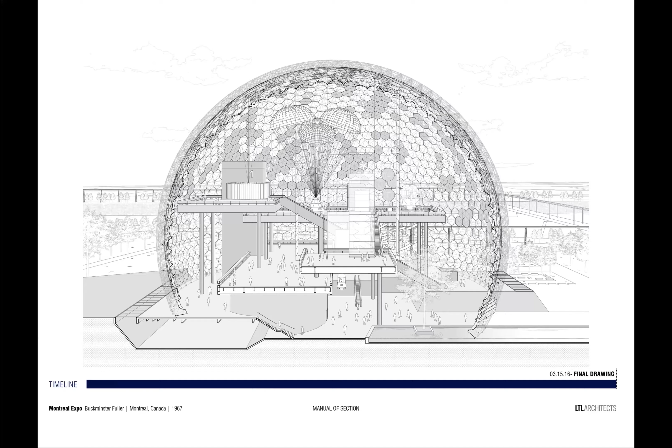Very lengthy, time-consuming. I think anywhere from 120 to 160 hours for each of these drawings to get them done. We had a great team of people working. No free interns, but an amazing collection of people who worked on this over 5 years to develop the project and to try to find consistency. We ended up having to have someone just do clouds for a period of time, or just do people to get these all together.

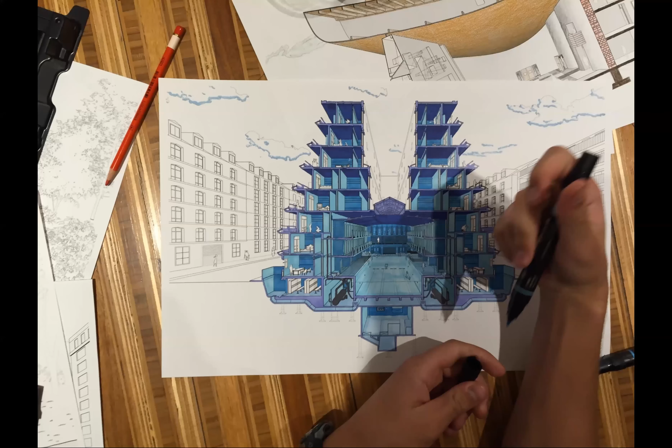And just finally, we did use it as an excuse to test out how it would work as a coloring book, and it produces very different effects when it gets colored. Our forays into becoming coloring book publishers were a bit of a disaster. We don't sell the coloring book anymore. I think we only printed 30 of them. But nonetheless, we thoroughly enjoyed the process of doing the manual, and find that it has influenced how we not only think about our work retroactively, but also how it's instrumental in how we move forward on current projects.

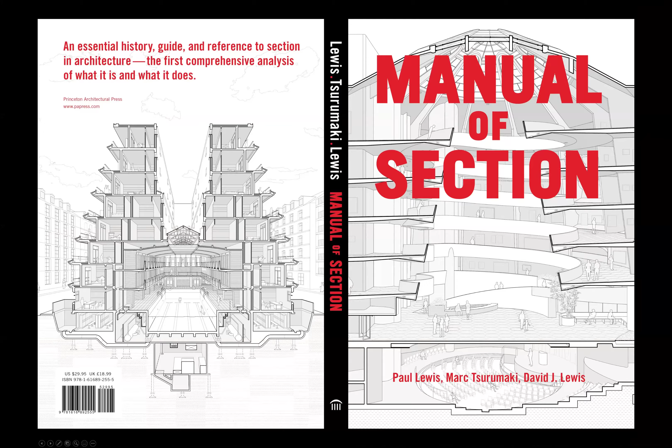So thank you. It was a pleasure to present this, even though I had no feedback. I have no idea whether anyone heard this. It's the downside to the virtual. But anyways, I know that everyone in my apartment heard it. So that's, I guess, something. So, anyways, I will stop my share. Yeah. On mute, Stephen. What's that? So I guess I'm more than willing to answer questions. What do you think is the best format, Stephen? Yeah, I'm having a slight problem unmuting. Can you guys hear me? Yeah. Great. Well, usually I do my little moderation thing.

Thank you, Paul. That was awesome. Your work is fantastic. You've really got a very strategically well-organized project to categorize your whole way of thinking, which is pretty impressive. And I know there are going to be questions about your drawings. Historically, your drawings were quite unique in their origination, and then as they lasted through the digital decades, and now are probably having a revival, it's quite interesting.

And so maybe you can talk about that, but something that came up while you were talking was I started thinking a lot about outliers. And I know you must have come up with some outliers that didn't fit into your logics of thinking. There's something really interesting about organizational strategies, and now I know you're starting a new book on, well, I don't know if you're supposed to talk about it or not, so we'll leave that to you to discuss.